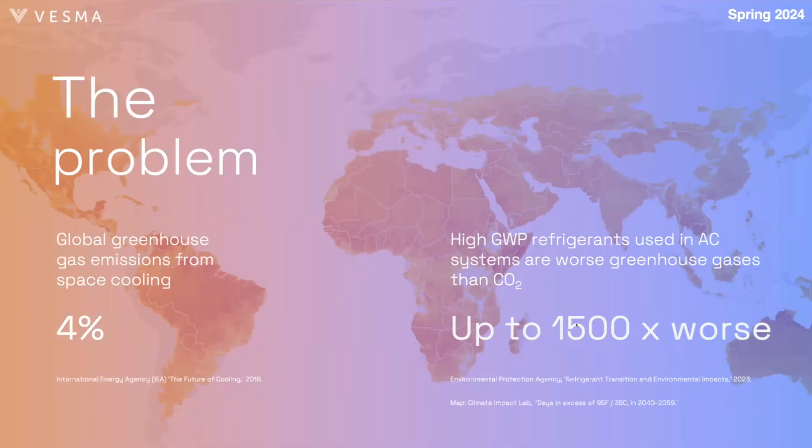So taking on that question of the energy spent to cool these spaces, most of that energy, about 80%, is actually driven by the moisture in the air, not necessarily just the temperature. So if we take this question, the notion that we have a lot of high GWP refrigerants in the process, we can take this 4% number, which comes out to about 2 gigatons of CO2 per year, and recognize that reducing these emissions isn't just a question of what is my set point, what temperature am I trying to achieve. Instead, we have to look at the emissions in this kind of one-third model, where about one-third of our emissions are coming from the energy used for cooling, and one-third is coming from the energy for dehumidification, latent heat.

So how do we actually remove moisture in there so we feel less sticky, so our bodies can properly perspirate and cool ourselves off, on top of other technologies that need that humidity reduced.

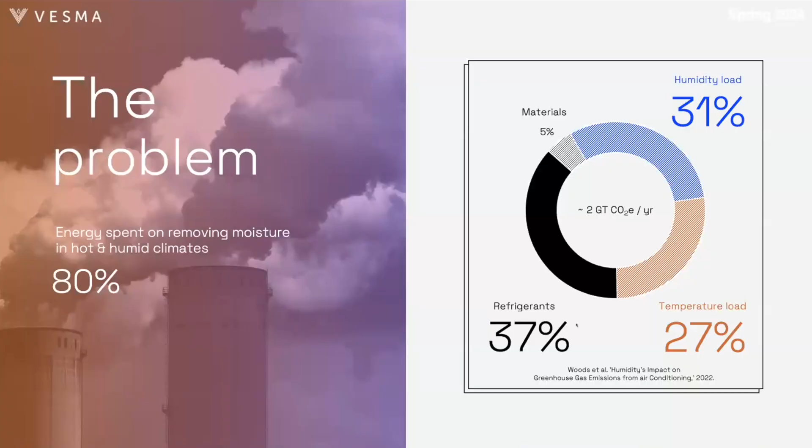But that other major third of that load that we're typically not thinking about is the refrigerants - these high GWP refrigerants that leak in the manufacturing of the AC unit. They leak during the life of that AC unit, and they leak at the end of that unit. So I'm going to talk about a few technologies that take on this problem.

But first, I'll go back and say that if we talk about where this expansion is happening in areas like India and China, we're going to see nearly a 3-fold increase in the amount of cooling we're going to desire. So we have these emissions related to cooling, but they're also expected to triple by the climate goals of 2050.

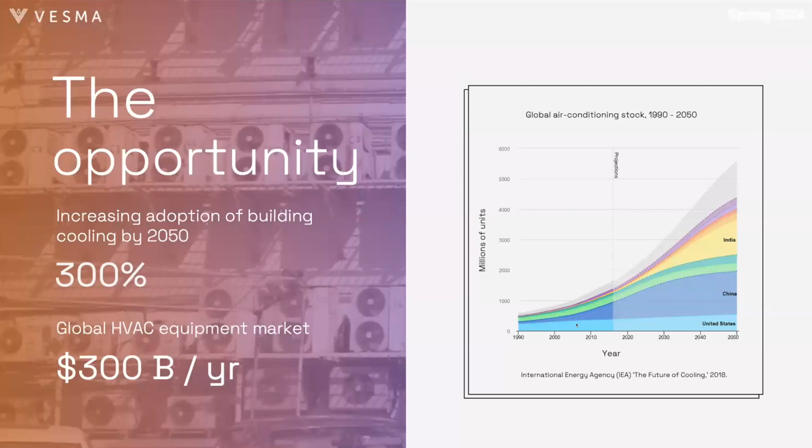And so this is a problem, but it's also for some of us an opportunity to say this is a very large market. It seems to be a market that is controlled by a few groups, but in reality, there's opportunity to advance new technologies in this space. We'll talk a little bit about that at the very end.

But the first technology I want to talk about is cSNAP. This is a technology that's been supported by the Wyss Institute as well as the Harvard Climate Change Solutions Fund. And this is an indirect evaporative cooler. So evaporative cooling is something that humans have used for quite a long time now. It's something we use to cool our own bodies. And we're looking at a way of doing this within ceramics, doing indirect evaporative cooling.

One of the major technology breakthroughs that we have is that we use a ceramic body, a ceramic heat exchanger, as a porous media to hold water, and that water is used in the evaporative cooling process to cool the air.

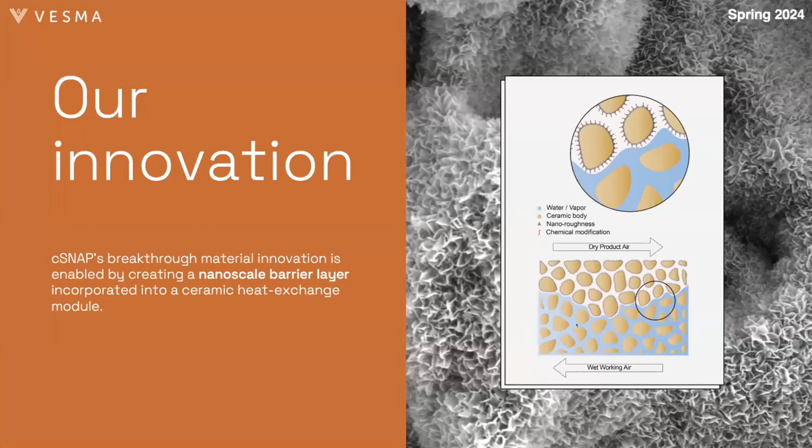But what we do is we introduce this rationally controlled barrier layer, in this case in the form of this Boehmite nanoscale structure that you see in this image, this flaky morphology that we then functionalize and are able to control areas of the ceramic where we'll have completely dry ceramic or wet ceramic. And this allows us to bring about the idea of an indirect evaporative cooler.

So we've worked with ceramicists in Spain to actually manufacture the exchange unit you see in the image on the right. What we do is we take these different channels and we coat them so that some are dry using our barrier layer, meaning dry air moving through them, and then some are allowed to be wetted by a misting system. Through this geometry, we introduce something called a sub-wet bulb regenerative indirect evaporative cooler.

So we can bring in outdoor air. That air passes through the treated channel where it becomes sensibly cooled by the channels next door where the evaporation is happening. Some of that now cool air enters the building, but part of that air is then regenerated and brought into the wet channels to allow us to cool below the wet bulb temperature, which is the typical limit of a normal evaporative cooler.

And the key here is that if I use a typical swamp cooler as the technology, I would be bringing in cool air, but I'd also be bringing in a lot of moisture with that cool air. So for one, it might make it uncomfortable, or two, in cities like Boston, it may not work that well because I'm limited by that wet bulb depression - the difference between the temperature I want to achieve and what the wet bulb of that actual temperature is. So this allows us to produce a more powerful cooling system enabled by this barrier layer.

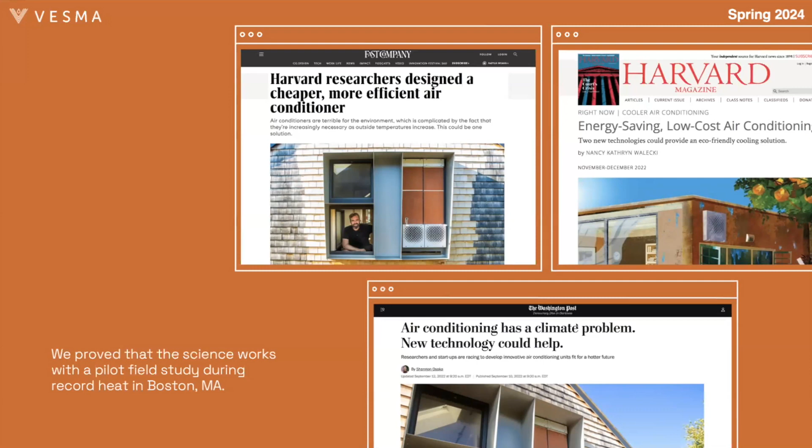And so we've done a lot of work actually field testing and proving it out. Two summers ago, we tested the system at the Center for Green Buildings and Cities House Zero. We pulled out part of the wall section and installed the unit and tested it over a record heat wave in Boston for a series of 2 weeks. And we're really happy about some of the press we got.

We're also really happy about the results. We showed that we could do about a half ton of refrigeration, equivalent to a typical AC unit you might put in your apartment, but we could do that at a much higher efficiency than a typical vapor compression unit, and we're also providing 100% fresh air. In this case, our refrigerant, our phase change, is water, so we have no high GWP gases, and we're using that water very efficiently.

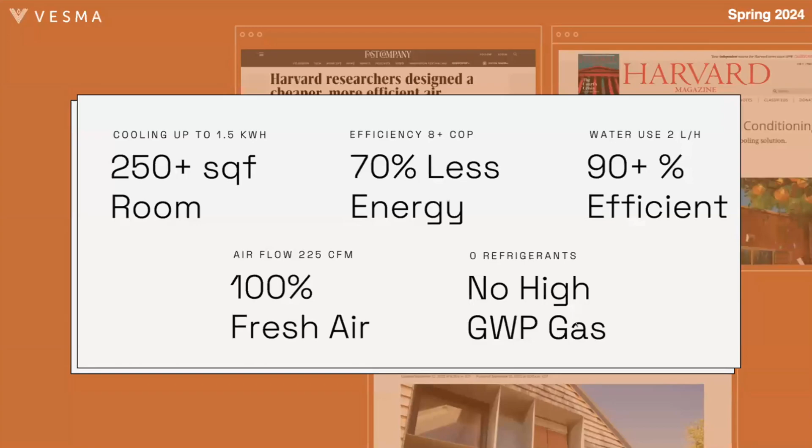So at the same time we're developing this technology, we were also funded by the Department of Energy and again the Harvard Climate Change Solution Fund to develop a different way of cooling. This is DryScreen, and this is looking at the latent heat, the dehumidification side of cooling through a vacuum membrane dehumidification system. In this case, we're really taking on that emissions load by the refrigerant, but also latent heat in the airstream.

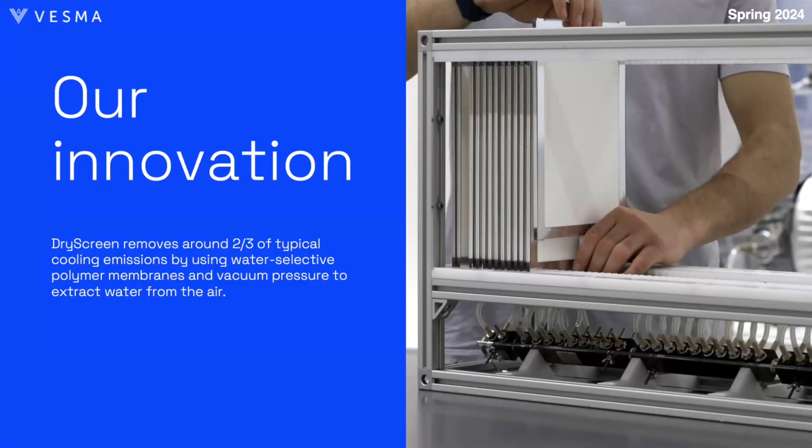What we do is we're using a very special water-selective polymer. This polymer is water soluble, and so it will quite literally pull water molecules out of an airstream passing the membrane. Then we apply a vacuum pressure to that membrane and quite literally just suck out the water molecules. So instead of using condensation like a typical system would, we're using a selective membrane that's only pulling water molecules out of that air, and isothermally, meaning there's no actual heat exchange happening, reducing the humidity load in the air coming in. We do this through this specialty polymer system that allows us to maximize the vapor flows through the system.

And just like before, we go out and test it. In this case, we went to a more humid climate at the University of Miami in Florida, and we tested this in an old 1950s building. It's kind of the perfect example of also thinking about retrofit solutions to our existing building stock. This is a system that only uses a typical AC window unit. It's meant to be naturally ventilated, but has been closed up ever since.

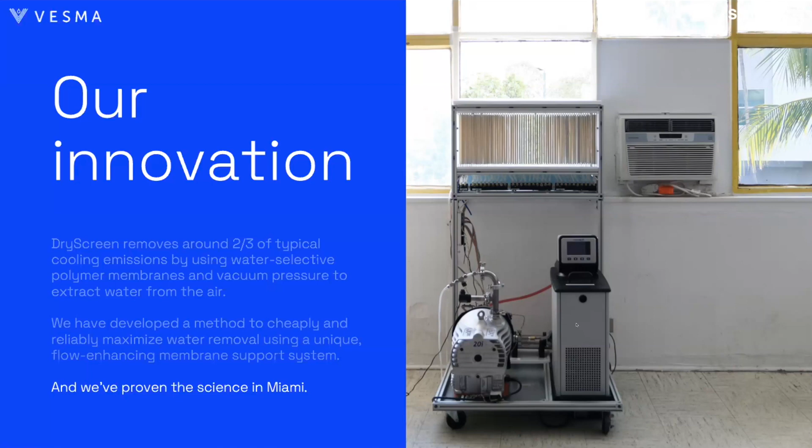So what we're showing here is that we're testing the ability for this particular system to dehumidify, but we're also looking at the thermal health benefits. In Miami, we might be able to bring in much warmer outside air and then dehumidify it and still hit the comfort specs that we need to have. So we're actually eliminating the need for cooling in some situations while being able to bring in fresh air, because we're just dealing with that latent load, or the dehumidification of air.

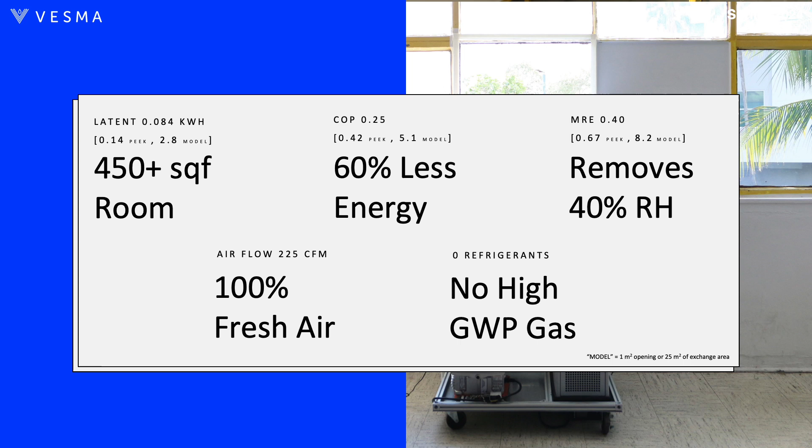And again, we had really great results showing that we could hit the specifications needed in that field of dehumidification while bringing in 100% fresh air, no refrigerants, and hitting those target energy reductions, especially without needing to sensibly cool the air. So if you're playing along at home, you might go, hey, there's a good opportunity here.

And that opportunity is the technology that I introduced, that's VESMA, where we actually combine these two. I don't want to go too deep into it, but I always like to at least put one psychrometric chart out there. The psychrometric chart on the right lets us understand how vapors and gases perform thermodynamically in buildings. This is what Willis Carrier invented 120 years ago, and it's kind of the way we've been doing things ever since.

But in this case, what we're thinking about is the ability to use the DryScreen system to dehumidify the air before it comes into a building. Now that we have drier air, we can use the cSNAP system as an evaporative cooler to its maximum potential. If we have more dry air and we're evaporating water into that dry air, we have a greater cooling potential because we have a lower wet bulb limit. And then the indirect aspect of our regenerative system allows us to get even below that.

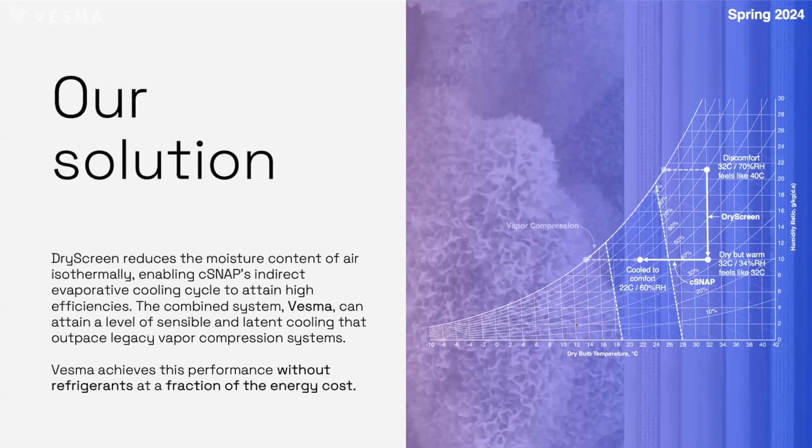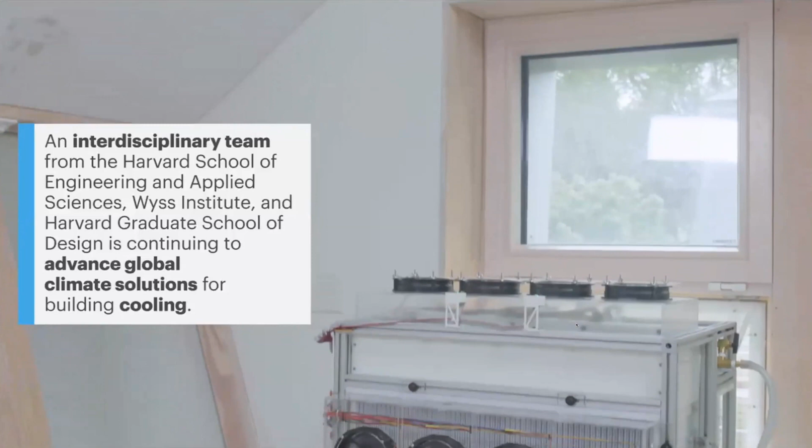So once again, we combine these systems, and I'll play a short clip of a video where we took this technology, now the combined VESMA technology, back to House Zero to test it in the live lab there. In this case, we combine the two into a smaller unit. We're not using ceramics in this case, just to quickly prototype the system.

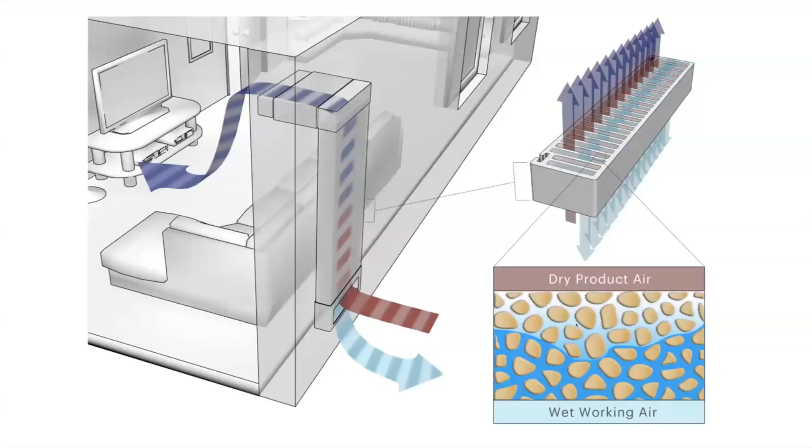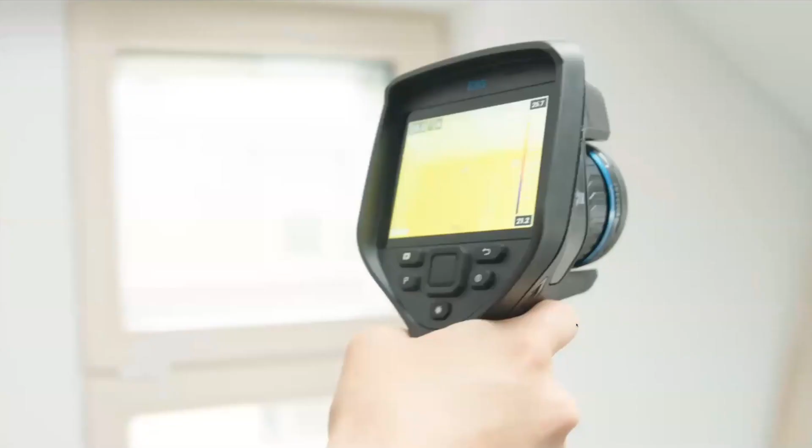This is always awkward seeing yourself talking in a presentation while you're talking, but it gives you kind of a run-through of what we're doing - this idea of the initial system using that barrier layer, and we can actually see it rejecting water there. And then the ability for that ceramic system to cool. But in the case of the VESMA technology, we combine the two: we bring in fresh air from the outside, we dehumidify it, and then we cool it using indirect evaporative cooling. So you can see part of the systems here.

We tested this again for about a 2-week period against a number of different specifications, and the results were extremely promising. One thing is that the overall system has a coefficient of performance around 4.3. That's probably on the typical end of a well-performing AC unit.

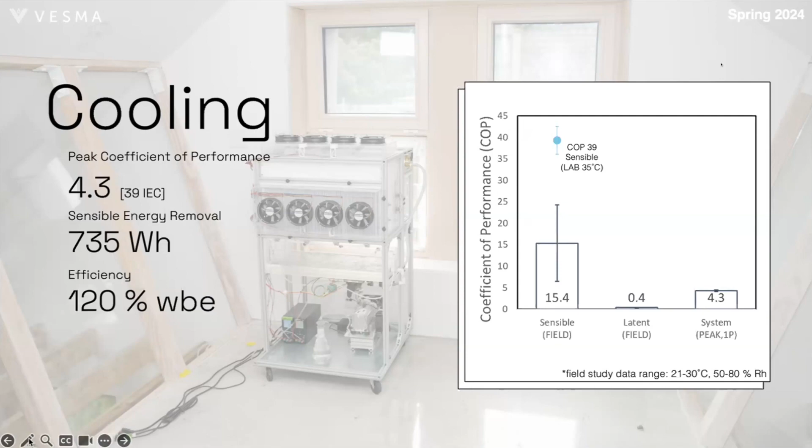What we're also showing is that combined, we have a lot of potential. The indirect evaporative cooling system performs extremely well. It can cool below the wet bulb temperature, and ultimately it can also hit extremely high efficiencies because we've been removing that latent heat in the system. But one of the other exciting parts is that we're collecting water as we dehumidify.

Air comes past our membrane system. We put a pressure on that to create a concentration gradient. We extract out the water molecules. We don't pull across air molecules, and we end up with water collection.

We show that the system can collect, for a very small system, on the order of about 3.5 liters per day.

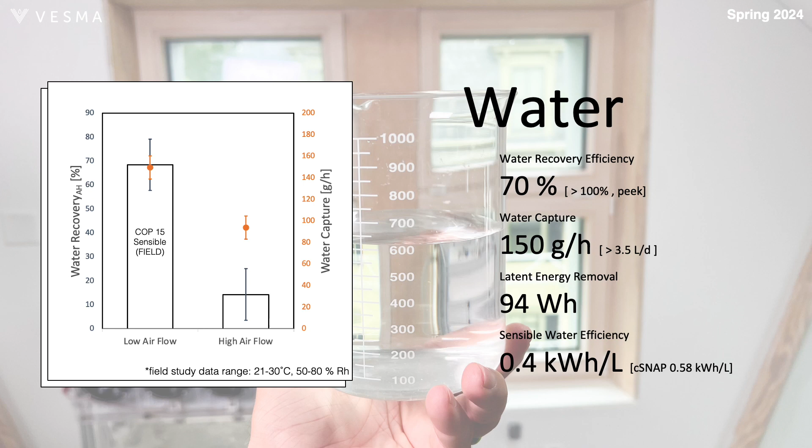When we think about the water being used for evaporative cooling and the water we're collecting, we show we have the potential for a water generating system, wherein if we balance the flow of air coming into the building through the evaporative cooling unit and through the dehumidifier, we have the potential to actually capture, under the right conditions, more water than the evaporative cooler uses. So we're also thinking about the other externalities of water usage in different resource scarce environments. It's another kind of benefit of the system, while we also achieve these other marks of performance.

One of the interesting aspects is that a lot of this is being driven by the ability to pump down vacuum on the system. As we think about where this technology could go as we scale it up into larger tons of refrigeration, something more akin to a large house or a commercial unit, maybe a rooftop system, we start to see the efficiencies of our system grow. We anticipate a much higher coefficient of performance - a term that basically says for every watt of electrical energy we put in, how much wattage of thermal energy out do we get. So something above 1 is always good, and we start to really push the limits of that.

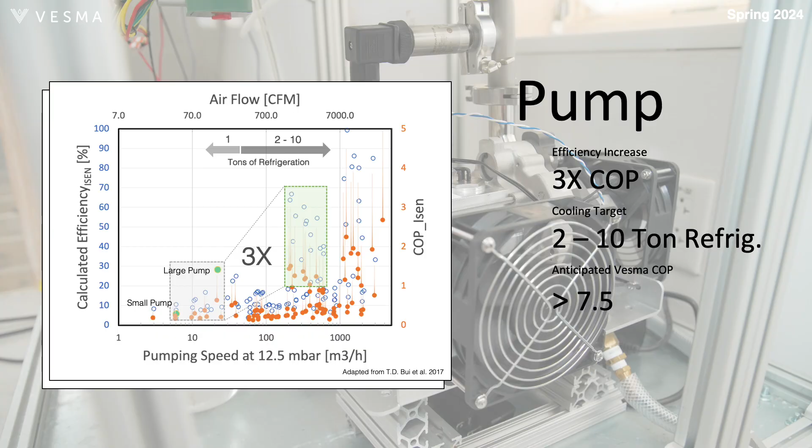Ultimately for Vesma, we have some takeaways from the project. We talked about a well-performing system where we're hitting the energy efficiencies needed to drive down related electrical emissions, this potential for water regeneration, the big key aspect of not using refrigerants in the process, and the ability to hit special target markets and improve performance in those markets.

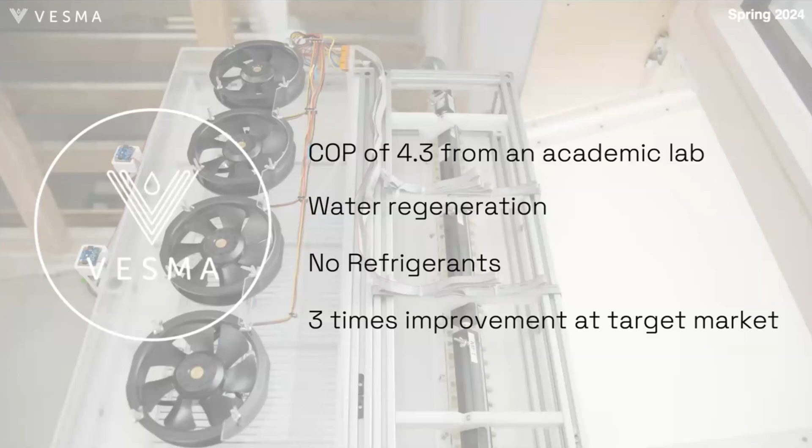With all this information in hand, we've worked really closely with the Office of Technology Development at Harvard, specifically Chris Petty, who's done an amazing job helping us get this technology out into the world. This year, we formalized Trellis Air, who will be using some of these technologies to look at possibilities of dehumidification in buildings. We're excited to not only speak about the potential of this research in a laboratory or the Harvard University system, but really drive the technology out into the environment, into industry, and hopefully provide real climate change solutions.

With that, I have to thank my close colleague, Jack Alvarenga, here in the image with me, and a number of other really important collaborators on this project, as well as a number of other universities, institutes, and industry partners. So I will end it there.

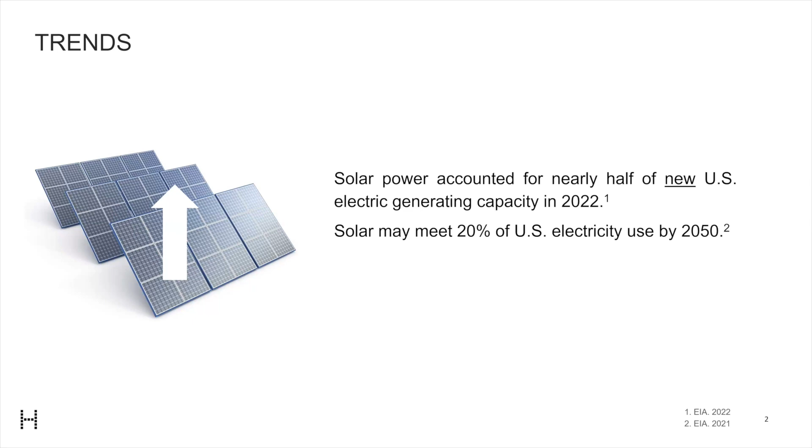So first, some trends. Solar power accounted for nearly half of new U.S. electricity generating capacity in 2022, and solar is estimated to meet 20% of U.S. electricity use by 2050. Perhaps we could make it more.

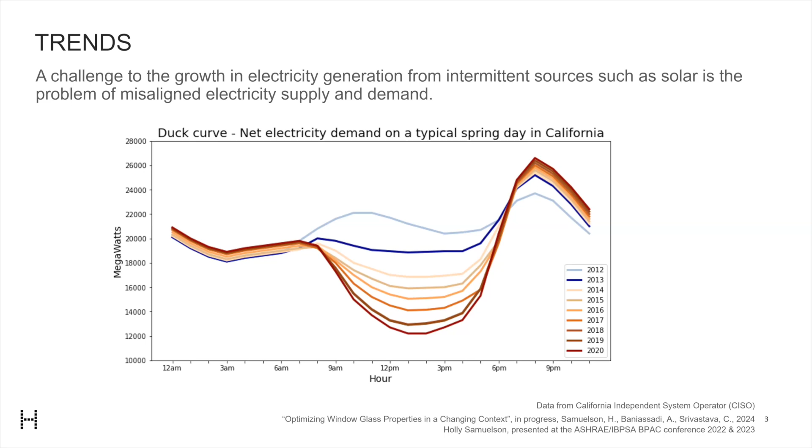A challenge to this growth in electricity generation from intermittent sources such as solar is the problem of misaligned electricity supply and demand. So what we're showing here is the infamous duck curve - a typical spring day in California - and you can see how it's changed over the years as more and more solar generation has been added to that grid. The midday electricity load is not really the problem; it's really the evening load that's now the problem.

Some other trends: we're seeing a massive incentive to switch from natural gas heating in buildings to heating with electric heat pumps. Here are two very recent headlines showing that last year heat pumps outsold gas furnaces in the US. This has ramifications at the building level that I'll get into, but it also has ramifications at the grid level.

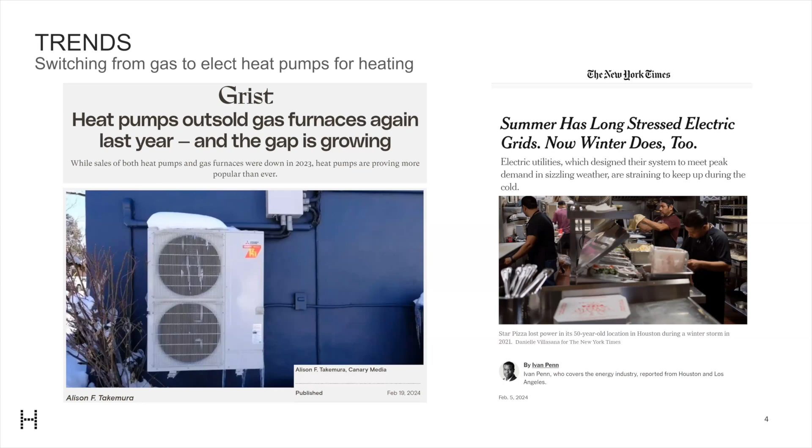So another recent headline talks about how our grids, we're used to them being stressed in the summer when everyone's running their air conditioning, but not necessarily in the winter because we're heating our buildings not with electricity. But that's expected to change, and some experts think that the winter peaks might outstrip anything that we've seen from the summer peaks in cold climates.

So for new buildings and for major retrofits of buildings, we have building codes that mandate that performance. And we have energy codes that mandate things like how much insulation we should have in our buildings and window properties. And window insulation values get a lot of attention, but what I want to talk to you about is solar heat gain coefficients.

So how much heat from the sun is allowed to penetrate through the window. Now, in these building codes that underpin our local codes, large residential buildings are grouped together with all commercial buildings. And office buildings and other commercial buildings often have a lot of heat generated inside of them by things like people and lights and computers, whereas residential buildings just have less free heat like that. We need more heating from your heating system, basically.

Another thing that shows up in most building codes is that the requirements for windows are the same for all windows, no matter whether they're facing north, south, east, or west. So I think this matters. I think that windows affect the timing of energy use, and I think that that is something that's newly important.

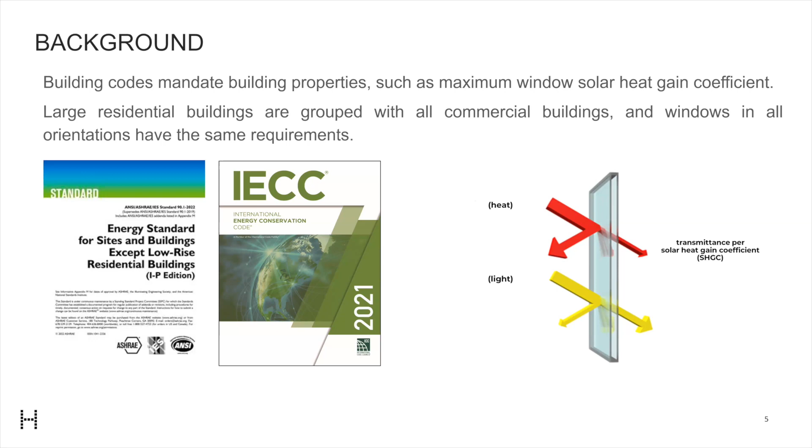So in large residential buildings, in our climates and colder in the US, we have a maximum value. And in our climate, Boston and similar climates, we even have a maximum value for small residential buildings like our homes. Now, even if you're not following these prescriptive requirements of the code, you can run an energy simulation to do whatever you want and show that you're being energy efficient.

And building simulation is the method that we use in my group. So what does that mean? It's a physical based model of a building. So we calculate all the different heat flows in the building based on first principles. Now, common practice that I've seen over and over again in so many reports and the underpinnings of our building code is that you test out different properties.

And generally, lower solar heat gain coefficient is usually assumed to be better. So over and over again, when you see in green building reports and standards, the windows that are good, better, and best, they're getting to be more insulative, less leaky, and they're always lowering that solar heat gain coefficient.

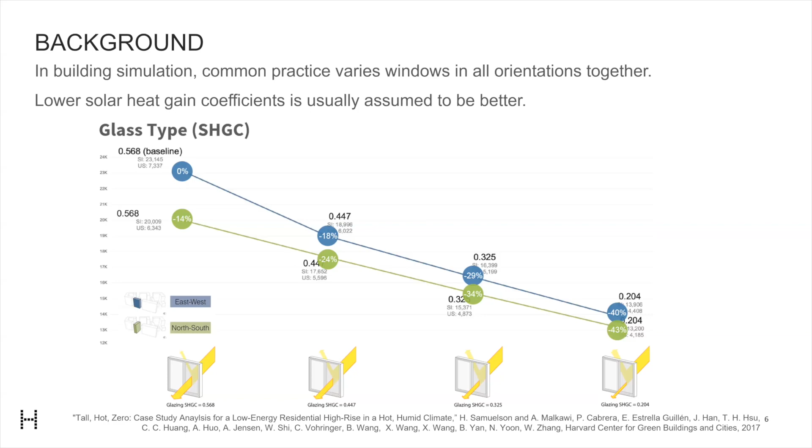By the way, I am a fan of overhangs, especially on south-facing windows, and our ideas would work even better there. But because they're not mandated and most buildings don't have external shades, we're looking at the worst case scenario here, which is buildings that don't have external shades.

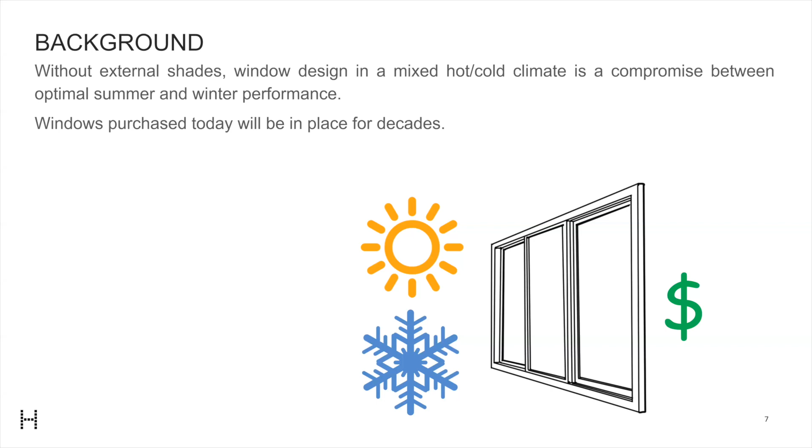Okay, so your windows in a mixed hot summer, cold climate are a compromise between optimal summer and winter performance. Now, without buying really expensive electrochromic glass, if we just have normal windows, you have the same glass year round, and you kind of want more heat in the winter and less heat in the summer, but you're stuck with one glass.

So it's the codes or it's the building simulations that are telling us what kind of glass we should pick. And this is important because the windows that we pick today will be in place for decades. This is an expensive choice to buy windows. But then getting the right windows in what I'm talking about is not necessarily more or less expensive. It can have a difference in cost, but it doesn't necessarily cost more to make the right decision here. So since we're spending a lot of money on the windows that we're putting in, we need to get them right because they're going to last for decades.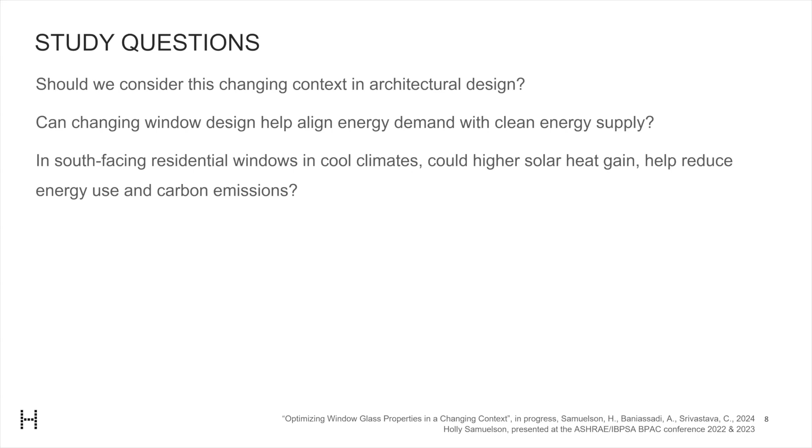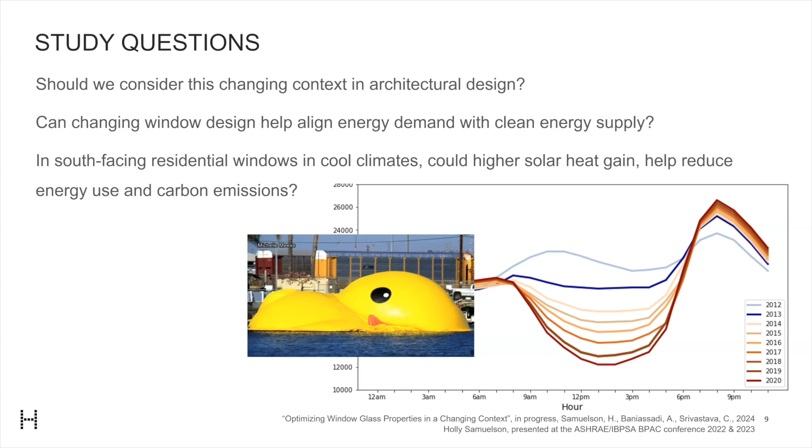Here's the specific question we're studying today as a case study: in south-facing residential windows in cool climates, could a higher solar heat gain help reduce energy use and carbon emissions? In other words, could architects and building owners making choices about their own buildings help flatten that duck curve?

Our study method: we simulated archetypical code-compliant mid-rise residential buildings, using models made by the U.S. Department of Energy—the same models used to make the model energy codes. We're using the same things with two exceptions. I want to look at the future of buildings, so we're looking at an all-electric building with heat pumps.

Also, we tested a range of behaviors. The codes are based on worst-case behavior, with lots of electronics running all the time and people not making good decisions about opening and closing windows, blinds, and lights. So here I'm just going to focus on one version.

Here's the crux of it: we're testing different windows, with solar heat gain coefficients from 0.2, or 20% transmittance, up to 0.8. We're looking here at south-facing apartments, though the results would hold true in near-south-facing windows too.

We're trying to optimize for different design objectives here. One, save energy—we want those utility bills to be lower. Two, maybe someone might care about saving non-solar energy—what if you have photovoltaics? You'd want your building to save energy when you have to buy from the grid.

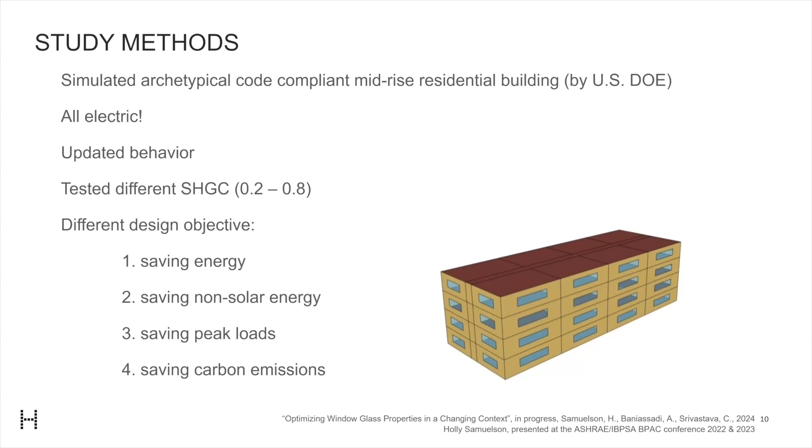Three, saving peak loads—that's the moment in time when your building is drawing the most power from the grid. That has ramifications because it affects your heating and cooling peaks, and the size of your heat pump—you don't want it bigger and more expensive. When a group of buildings does this, it affects the peak draw on the grid. And finally, saving carbon emissions, which is kind of a new goal, believe it or not, when thinking about building design.

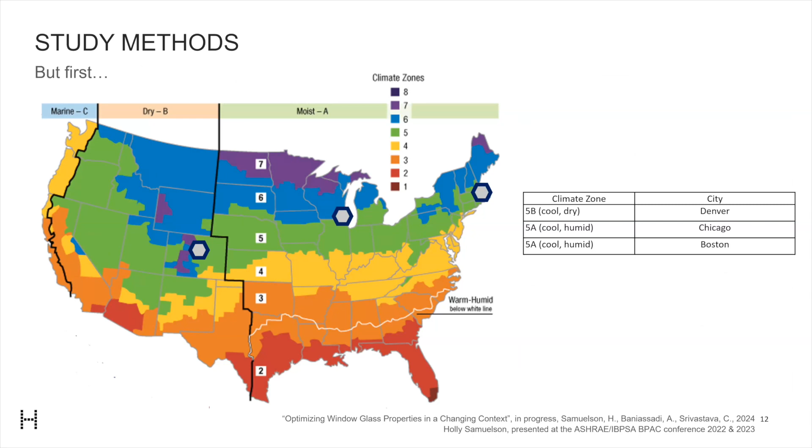So our study methods: we looked at this in 19 cities, but first I just want to focus on 3 cities—the one we're in, and one slightly colder and one slightly warmer. I want to show you a number of trends.

There are a number of temporal trends going on with windows, solar generation, and heat pumps, and that's the crux of all of this. I want to demonstrate what's happening over time—we can't just add everything up on an annual basis and go with that, like we have been.

So here I'm showing the 3 cities, demonstrating how much radiation is entering from a south-facing window. I'll show these graphs over and over again—across the bottom is the months of the year, and the y-axis is the hours of the day. The red means that's when the most heat is being emitted.

You'll notice it's not in the summer for south-facing windows—it's actually, in these cities in these cases, January and February. That's for south-facing windows. The reason is, if you think about the sun angles, when it's coming from the south in the middle of the day, the sun is very high in the sky during the summer.

So those angles, that radiation tends to glance off the glass more than when the sun is low in the sky in the winter, and it's penetrating through. So near-south-facing windows are pretty special for us.

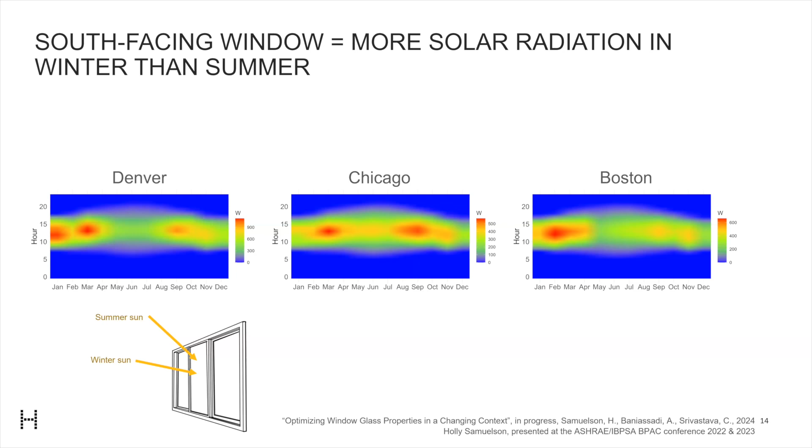So what happens if we were to change this? Here I'm plotting the change if we went from 33% solar heat gain to 65% solar heat gain windows, just to demonstrate the difference. Across the top, I'm showing the decrease in heating demand and the increasing cooling demand. This is how much heat or cooling your building needs—I haven't applied a system yet.

A few things to notice here: one is that the red is good on the top row. There's a decrease in heating demand even at night when the sun isn't shining. I haven't done anything special to this building—this is just due to the heat stored by the normal floor, walls, and things in the building. So when you've got that sun penetrating in the middle of the day, it helps save energy even into the night.

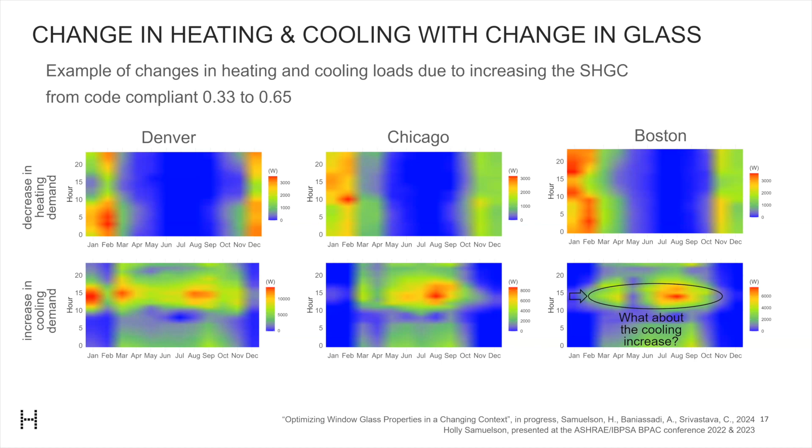Admittedly, the cooling demand has increased, as you might expect. In the summer, you let more heat in through the windows. So you might be thinking, this ain't good. But there's a few other things going on.

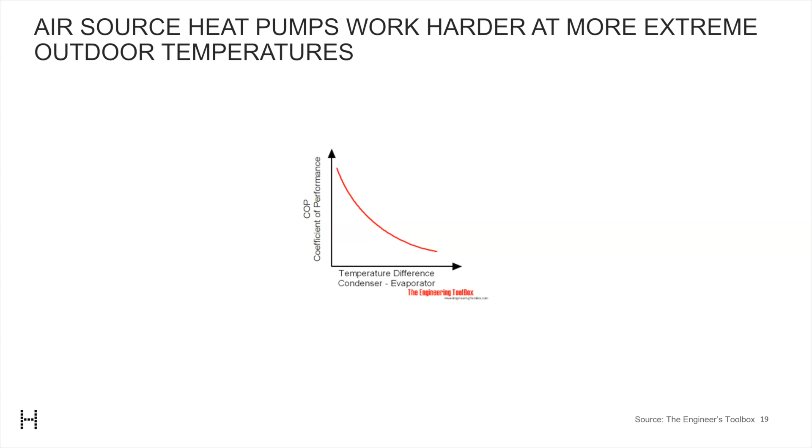We're focusing on buildings that use air source heat pumps, the main new method of heating and cooling buildings. They have to work harder at more extreme outdoor temperatures. The colder it is, the less efficiency you get with your system, and the hotter, the same thing. Just the laws of thermodynamics.

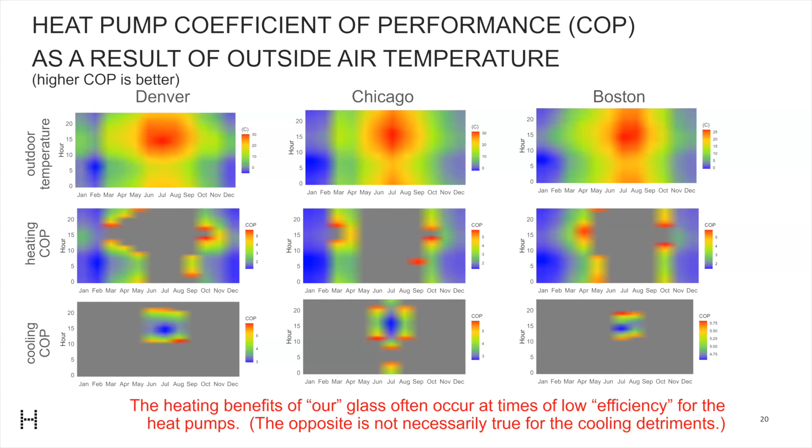Personally, I'm feeling better about this, but what else? What about when can solar panels produce? So what we're plotting here are the temporal patterns of photovoltaic panel production. You might see a kind of familiar pattern. Here, when we changed the glass, we increased cooling, and it has some correlation to when a solar panel can produce.

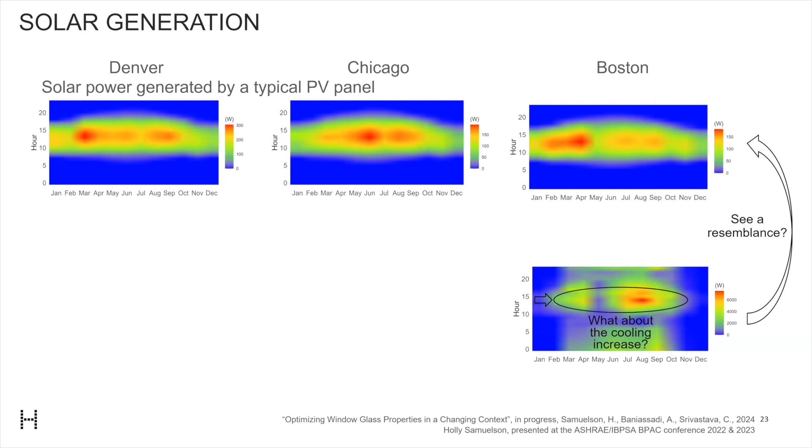Okay, but someone could say, not all of the electricity we're adding to a grid is meant to be solar. So here I'm looking at a different case. This is from the National Renewable Energy Laboratory, their Cambium data set, showing long-run marginal emission rates. This is a mid-case rate. I don't have time to get into all the details, but there are different ways to predict carbon emissions. This is one of them, and I think it's a good corollary to looking at energy use.

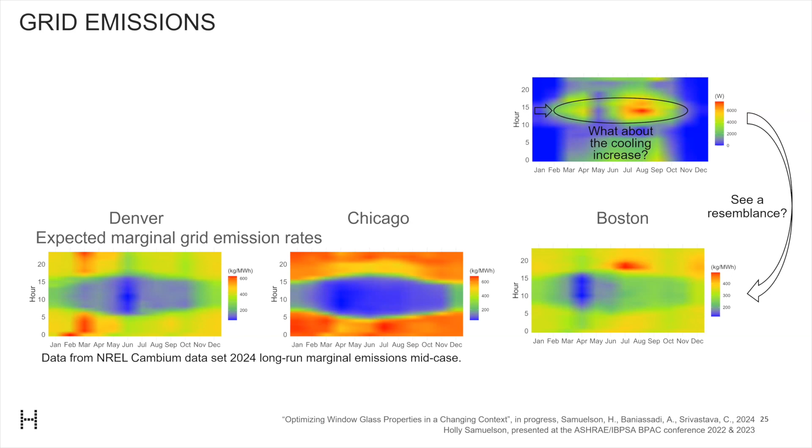You can see that there's still a pattern here, and it still kind of resembles when we would be increasing that cooling load. It's still when the electricity on the grid is meant to be cleaner, that's when we would be using more cooling energy. So what I'm trying to say by showing you the patterns of solar panels and the long-range marginal emissions rates, is that the penalty in cooling demand with this new glass mostly happens at times when solar energy is abundant for clean power generation and marginal emissions are cleanest.

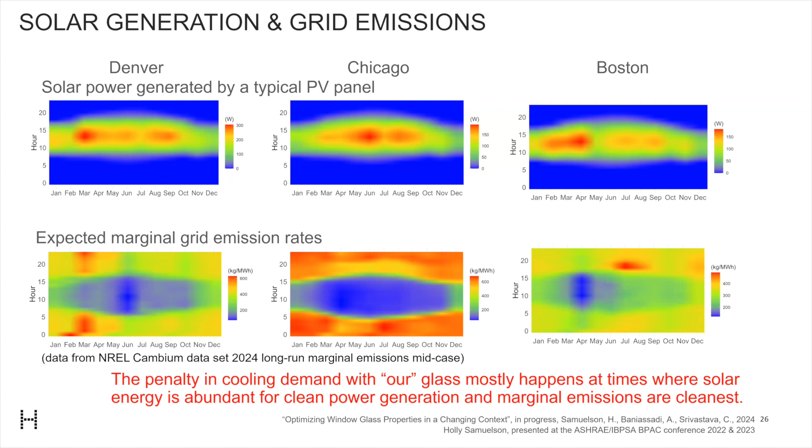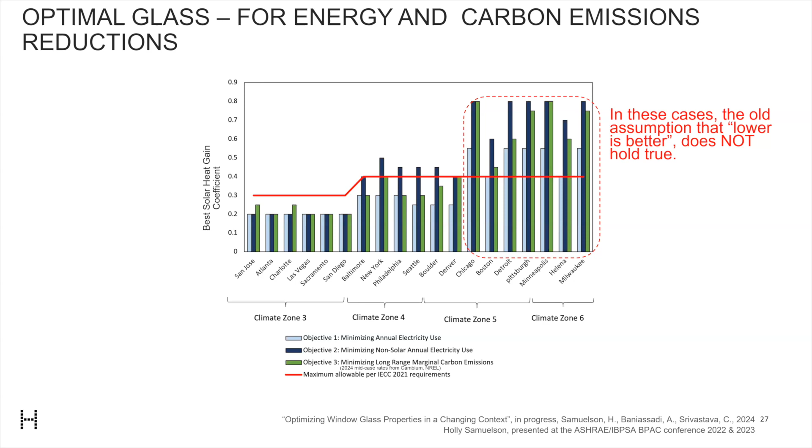So what happens across our 19 cities? In the warmer climates over on the left, climate zone 3 and 4, we're okay. On the y-axis we're trying to show the optimal glass, and in red, typically people think the rule of thumb is that lower is better for energy performance, and the codes allow a maximum value shown in red. In the warmer climates, no problem. But in the colder climates, if we're looking at minimizing annual electricity use, non-solar electricity use, or long-run marginal carbon emissions rates, the old adage that lower is better does not hold true. We might actually want these windows to be much higher than what would be allowed by prescriptive code.

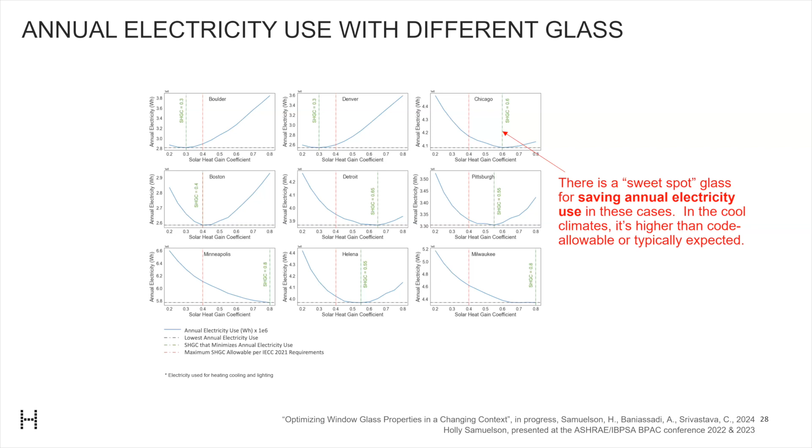So here's the actual energy results, to see how much energy we save for heating, cooling, and lighting for the different cities. Energy is on the y-axis, glass that we're trying is on the x-axis, and you can see there's kind of a sweet spot for saving annual electricity use. In these cool climates, it is higher than code allowable or than typically expected. It's the same idea if we look at carbon emissions, and if we're looking at non-solar electricity, the higher the better.

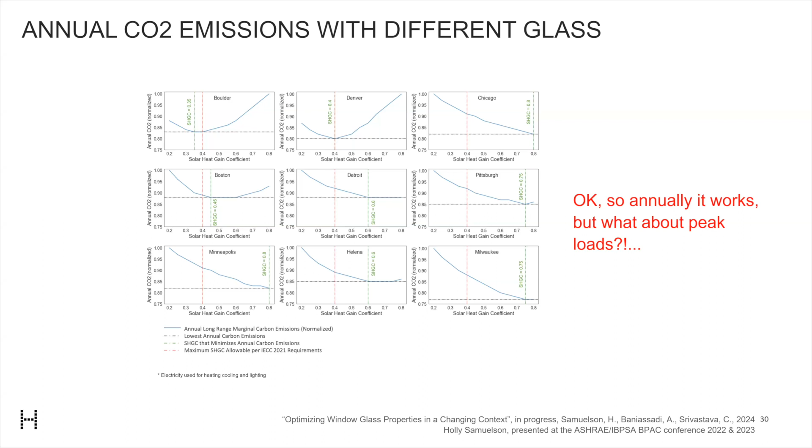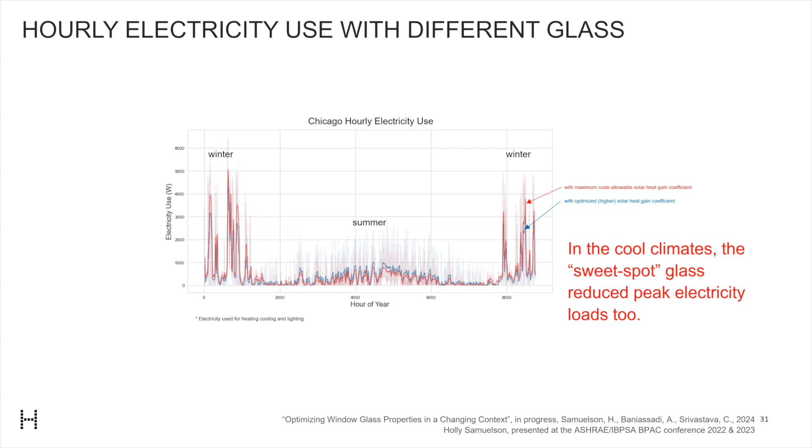Okay, so it works out annually, but the concern is always, what about peak loads? We don't want huge systems, we don't want to overwhelm the grid. Well, in the cold climates, it turns out that works out better too. It's a win-win. So what we're showing here are the hourly electricity demands for one of these buildings in Chicago, and you can see that the winter peaks of electricity demand are far outstripping the summer. Our glass, if we change it, is actually helping the overall peaks. It's helping those winter peaks, and slightly hurting the summer peaks, but that's not driving the size of the grid generation or the HVAC system.

So in summary, by optimizing the solar heat gain coefficient of the glass in the cool climates compared to the best allowable by code or rules of thumb, we get 0 to 25% savings, depending on what our goal is.

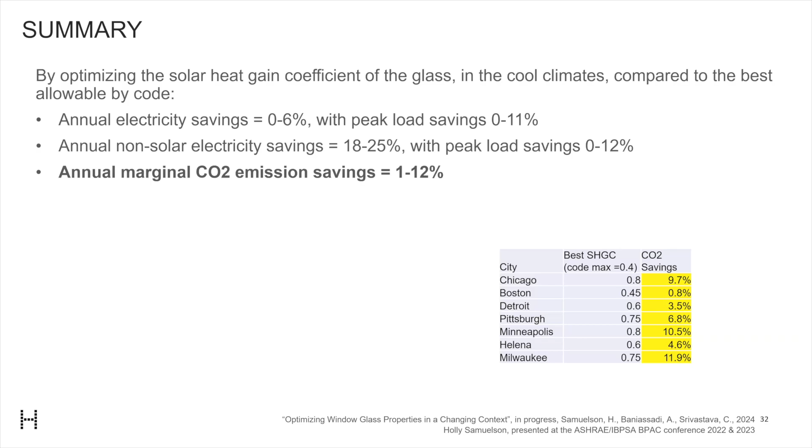So here with the CO2 emission savings were 1 to 12%. Electricity savings were up to 6%. This was very exciting to us because if you're trying to save energy in these new code-compliant, today's standards buildings, saving 6% is huge. We spend a lot of money just to save 0.5%. So these are big numbers, and we were very excited by this.

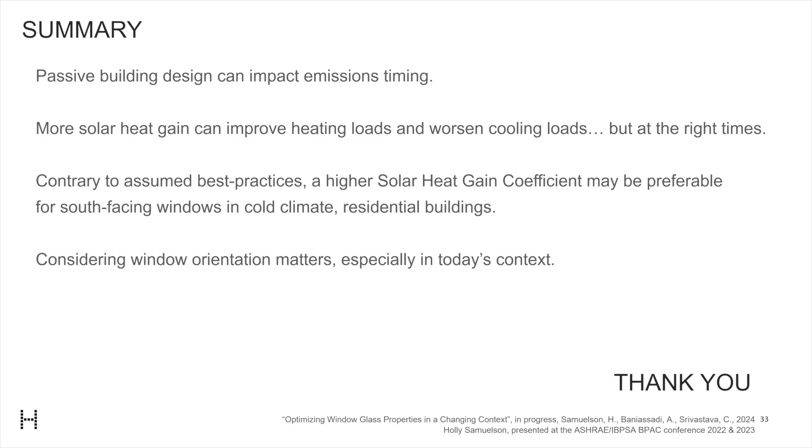So, summary: passive building design can impact emissions timing. More solar heat gain can improve heating loads and worsen cooling loads, but it's happening at the right times. Contrary to assumed best practices, a higher solar heat gain coefficient may be preferable for south-facing windows in cold climate residential buildings. This is what I did in my home. So considering window orientation matters, we should be doing this in practice, considering different window properties on different north, south, east, west orientations separately.

Thank you, that was great. So I'm going to start.

We have some good questions in the Q&A stream, we'll get more. Could you explain to me what the coefficient of performance is? You both use that term, but I'd love to have a definition, and why is that a relevant concept?

Sure. So for every unit of electricity that you use, it's how many units of heat that you move. We've learned in physics class that you can't have more than 100% efficiency, but a heat pump's not trying to make heat, it's trying to move heat. So for 1 unit of electricity in, you can be taking from the outdoor air more than 1 unit of heat and moving it in, or in cooling mode, more than 1 unit of heat from your building and moving it out. So higher is better.

Higher is better, okay. So that's the same concept of coefficient of performance that you're using, Jonathan, in yours. And I have one more technical question to make sure I understand your system.

If I understand it right, it's important to have these 2 parallel shafts, because what's going on in one of them is that you're getting the evaporative cooling - it's wet, or you're wetting it - and that's cooling the entire ceramic block. Air is flowing through the other one, and it's getting cool as it flows through, and that's the mechanism for cooling the air. Is that right? Yep, correct.

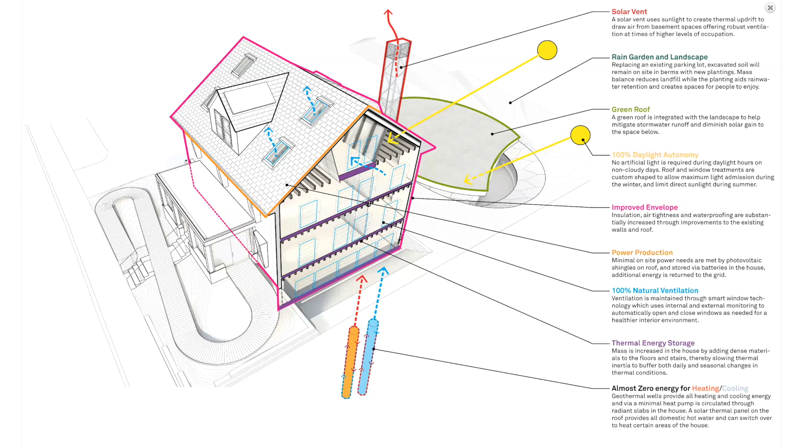I'll say it's a great example of retrofitting existing buildings. It's a 1920s house that the Graduate School of Design acquired, and working with architects Snøhetta, director Ali Malkawi upgraded the building to look at how to draw down energy use. Ali, being a mathematician and designer, brought in a lot of computation and sensing. What's been remarkable after commissioning is also how we use data to better understand the ability to reduce energy—we can track where energy is being used, whether assumptions made in early schematic design are correct, and then change how the house is operating. He and his team have done a wonderful job dropping the energy use of that building. We've also published on the question of total carbon balance—how much carbon was put into making the building and the different energy-reducing technologies, and how much those could offset future emissions.

That's great, thank you. There are so many good questions. I'm going to turn straight to reading the Q&As here.

How are there all these all-glass buildings with no operable windows getting LEED Platinum certification? Something seems wrong here. I agree—in the first generation of LEED, there were credits for bringing in more daylight and views, and there was a bit of overkill, with not as many credits given for energy. Now LEED has changed, and there are more credits given for energy, and the daylighting standards have changed so there's a cap. But in recent versions of LEED you can still get away with it. I think the industry recognizes this, and codes and voluntary standards are realizing we're now demanding higher performance.

Have you looked into the energy saving potential of movable window insulation? I know there's a bunch of technologies—like there used to be something where you shoot beads between two panes. I remember growing up being told to draw the shades when I left in the morning if it was going to be sunny and hot, since we didn't have AC. I think it's a good move—it's something I do myself. I have honeycomb blinds with some R value, and I close them at night. So yes, I think that's a good strategy, but it's complementary, not a substitute, for the sorts of things you're looking at.